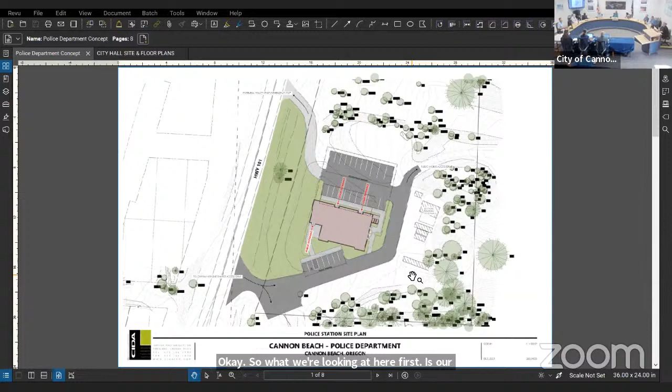So with that, I will share and we'll look at some images. Okay, so what we're looking at here first is our conceptual proposed site plan for the police station. I'll start with a rough overview.

So the highway, the southern access here is the shared access with Public Works. Our proposed site circulation is that being the primary access, coming up to an area of public parking. The building is located on the flat portion up on the hill of that site. We've been working with the police department and with emergency management in terms of maintaining its function as the cache site. So one thing you'll see on here are the existing cache shed and the containers there as part of the plan. At the north side of the building, we have secured parking for officers.

I'll zoom in and talk a little bit about that more in a moment. The northern access here in lighter gray, this is something that we've been working with ODOT on both of these access points. We've gotten pretty clear confirmation that the southern access will be allowable without triggering highway improvements, which was great news that we got from them.

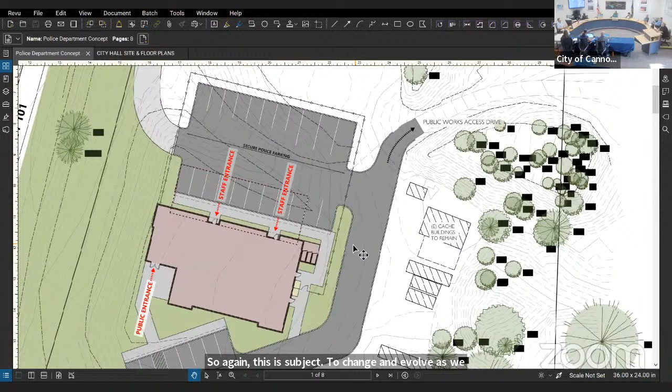The staff entries are from the secure parking area. The idea is that police vehicles would come up here, enter the secure parking area, and then have dedicated entries on the north side of the building, separate from that primary public entry.

Are there any questions on the site plan for this before I move on?

Thank you, Leslie. So when you said that it's probable that the north entrance exit may not be allowed, did I hear you correctly? You did. So if it is allowed, you're saying you want the police vehicles to only be able to use it? That was our original concept.

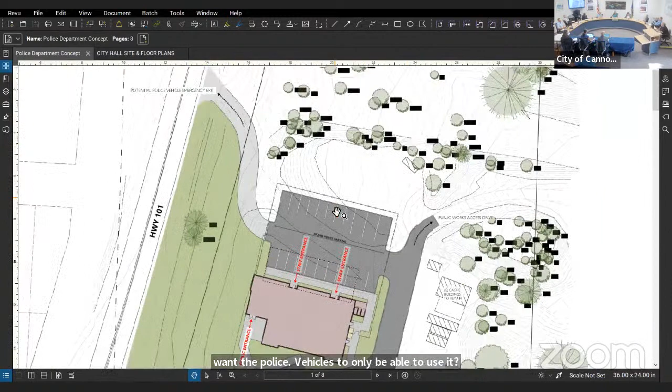Yes, it's shown as a narrower road than the primary entry and exit. The concept is that this would be a fast, efficient way for police vehicles to leave the site without crossing other traffic, so it would be an exit-only path from the secure parking. So if anybody parked in the public area would just need to turn around and go back out the way they came. Correct.

What we learned from ODOT is that they don't have a record of this being a permitted access point, so to keep it, we will need to apply to have it granted as an access point. Thank you.

Leslie, there's an area in there that's been used as a helipad. Is that still part of the plan or is there an alternative plan? So the plan right now is to size that secure parking area sufficiently so that it may be used for helicopters. I'll say this plan is being reviewed currently because we received the survey work to understand the topography a little bit better.

So we're currently looking at ways to lessen the impact on grading. My guess is that will impact that secure parking area the most, because that's where we have the most change in topography.

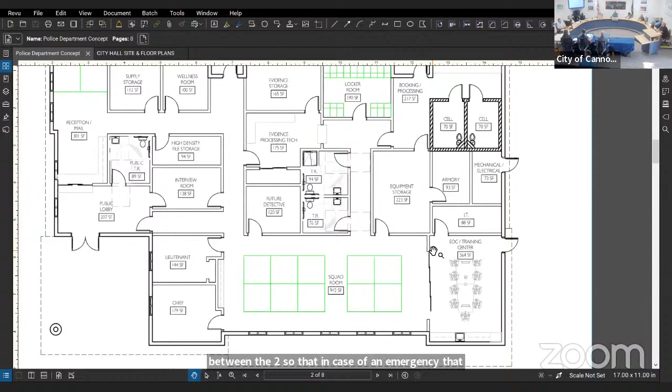This is a sliding wall between the two, so that in case of an emergency it opens all the way up. You can also repurpose that squad room for a large area out of which to operate the EOC.

From this second entry, just moving to the back, is another secured area of the building. This is the processing, booking, and the couple of holding cells we have. So if someone is in custody entering the building, they would be limited to this corner for booking and the holding cells only.

Beyond that, a few other areas we have storage for equipment, storage for evidence, and evidence processing. Those are the primary functions we're looking at. Any questions or comments on that?

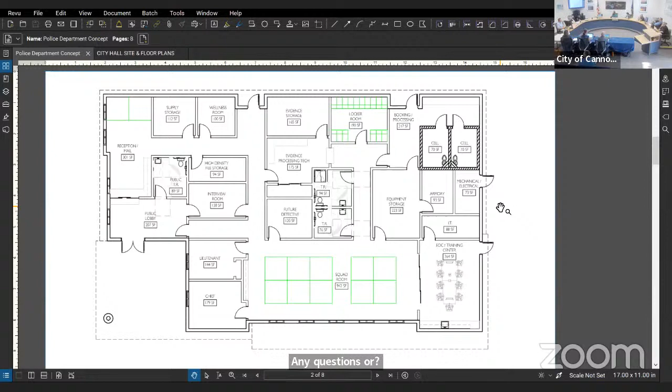Where are the showers? There is one shower; the toilet rooms are placed centrally. One of the toilet rooms includes a shower, the other one does not, placed in proximity to the locker rooms. That's one of the comments we may review, for reorganizing to get that even closer to the locker room.

Did you mention the evidence processing and evidence room? Only very briefly. So evidence processing is here. It is located here because it is admin staff who has primary access as the evidence processing technician, and this is another very secure area with exclusive access to evidence storage.

This rectangle you see here in the wall would be an evidence pass-through, kind of like mailboxes, so that officers coming in from this back entrance can drop off evidence and work with evidence before it goes to the evidence tech.

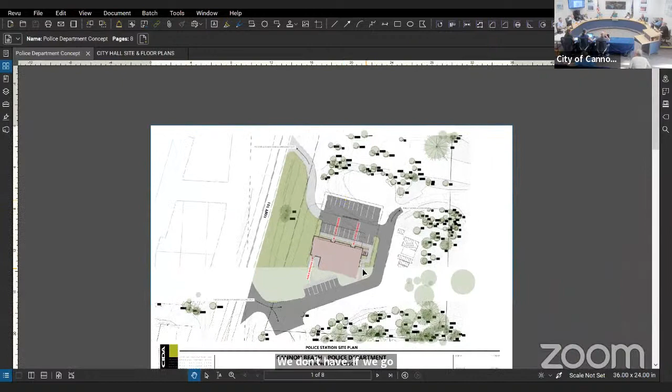The site for that is fairly constrained. We don't have a lot of area to grow. Depending on how this secure parking area evolves, there may be some additional area on the north side of the building that we could push that way. We are proposing covered parking back there, but there may be some additional flat ground.

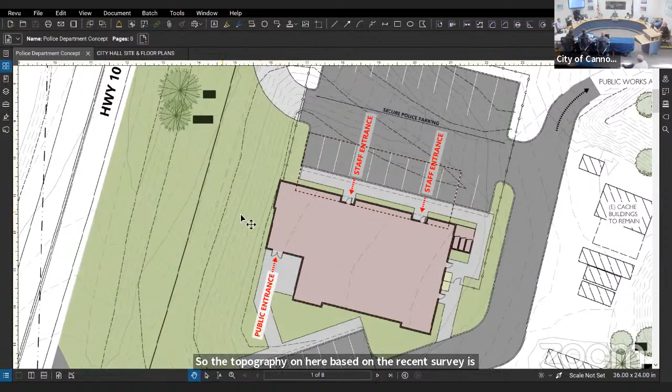Towards the highway, it would be a challenge to grow on that slope. The site plan shows what appears to be quite a bit of room, but in reality that's not the case. The topography here, based on the recent survey, is included - all of these dashed lines represent a foot drop. So in the future, if that were to be an addition, it would require additional site fill to build that up to have level ground.

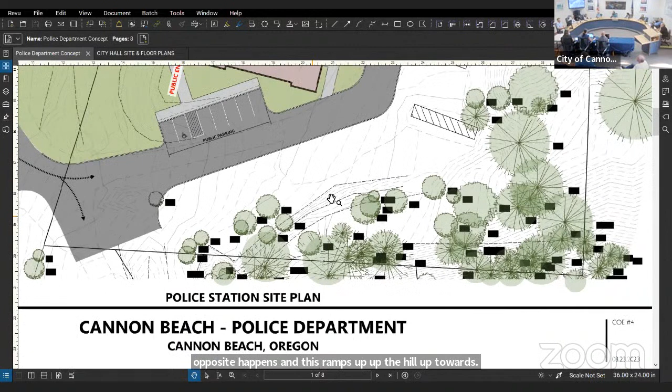Can you talk about to the north, what happens with the grades too? So to the north, we do have another area that is relatively flat - this is where I think some of that secure parking may shift. But around the site it gets very steep very fast. There's a creek or waterway that runs down north of the site, so it drops off pretty significantly. On the south side of the site the opposite happens, and it ramps up the hill toward the water tower. So the slopes would require substantial consideration.

In addition, if securing that availability of space immediately adjacent is something we wanted, then we would want to discuss that now. Because then we would relook at the parking - now that we have the survey, we can say okay, we want to preserve another 1,500 square feet or whatever the number is for an addition. If we want to do that, we should plan that now. And it's a great question.

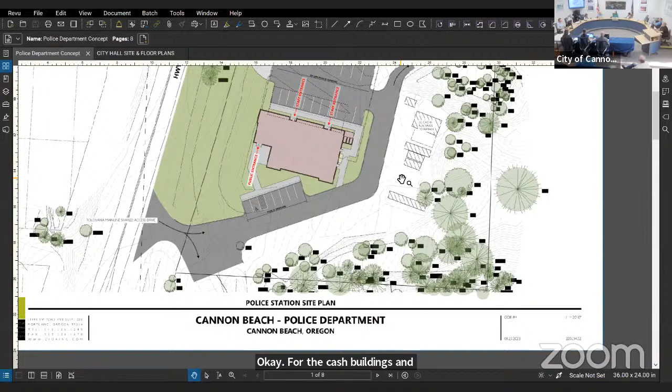So the cache buildings and containers shown are there and they're going to stay there. Yes, they're shown according to the survey work. Just to clarify, the building could go that way and the driveway could move further out, and the cache buildings could be found an alternate location if needed. So that's another kind of exit strategy to add more square footage down the road.

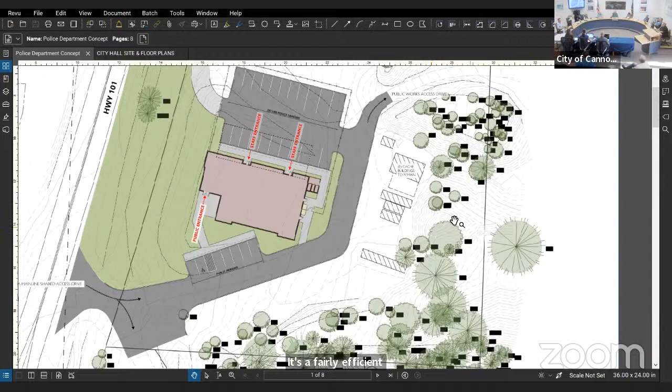It's a fairly efficient plan. What you're seeing is meeting the needs, meeting the projected growth, but there's not a lot of extra space—not a dance floor in there.

Did you want to say something? Yes, in the past we've offered tours of the police station and City Hall. Just check with Jason and we can offer tours of City Hall and the police station tonight after the meeting, if anybody is interested. If you haven't, you should. Yes.

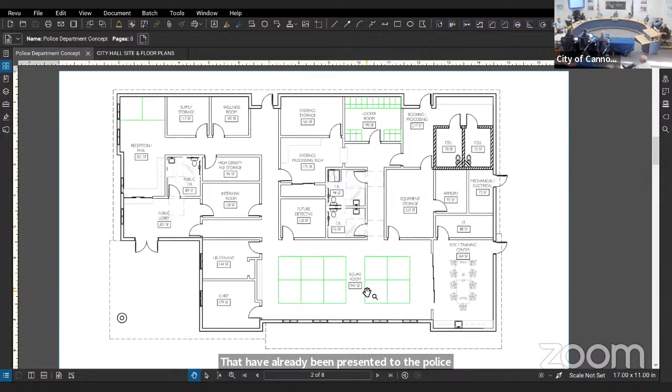Okay, so we're ready to see what it might look like. Again, these are conceptual plans, but we put together a couple of options that have already been presented to the police department. We have a preferred option here to present. This is option one.

Again, this is the entry point for the public with a covered area. The raised portion of roof here is the squad room. Up here we had the chief's office and lieutenant's office.

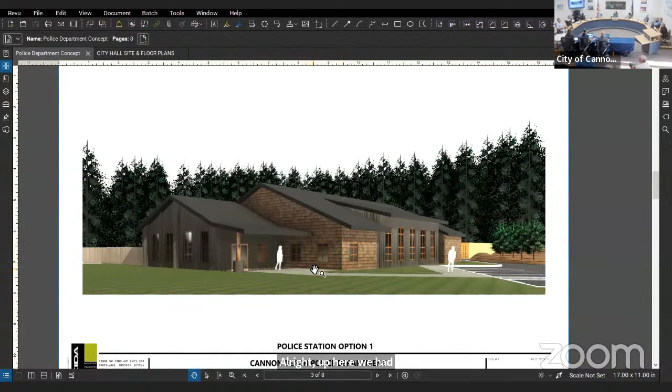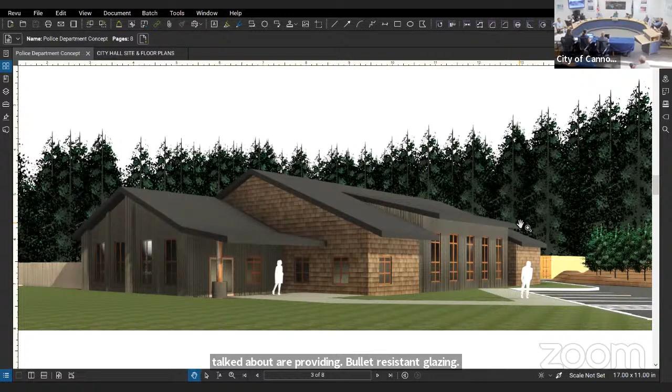One of the things we're working through is glazing and security, so there are many options here. We've started having these conversations and they continue about balancing security concerns, privacy concerns, and natural lighting, and which areas those make sense for, and how we can mitigate some of the security concerns through various options. Some things we've talked about are providing bullet-resistant glazing of certain levels in certain areas. Also, we've talked about modifying the size of some of these windows or changing the type of glass for more privacy, potentially raising the windows up so they can allow natural light, but also privacy and security. So that's something we're talking about and will likely evolve as we move forward.

So the site is out of the tsunami inundation zone. Yes.

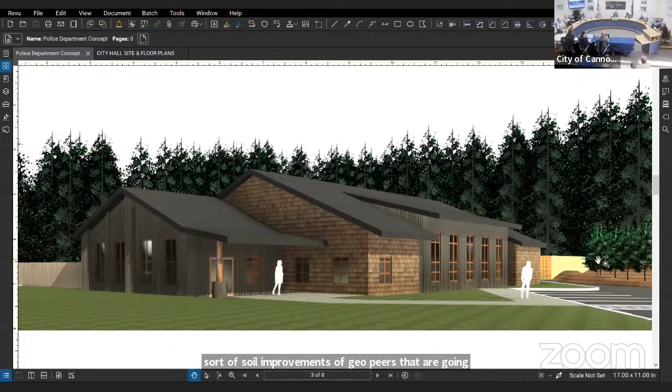Maybe Jordan, can you describe what's involved in the category 4 seismic construction that we don't really see here? It's really attachments of walls to foundation and then roof to walls—that's the biggest piece, making it resilient. Then there'll be a shear wall component that keeps the main structure together. You don't really see a lot of it; it's really a lot of hold-downs holding the walls down to the foundation. In this case, we're going to have some soil improvements and geopiers that will tie the foundation to the soil in case of liquefaction, along with a lot of strapping on the roof to the walls, so really making it one main diaphragm. The category 4 seismic is required by law in order to be an essential facility—it's required. Yes, Emergency Operations Center. Yes.

And that means that it will remain operational during an event. What does this building require in terms of withstanding a landslide? Because this has been deemed a landslide area.

We will know more about that when we get the geotech report. The drilling is scheduled 2 weeks from today, and we expect that report at the end of September. I'm hopeful, because the equipment that was set up for the Southwind site for the landslide, we had someone go back and read what had happened over these last several years, and there had been no discernible movement.

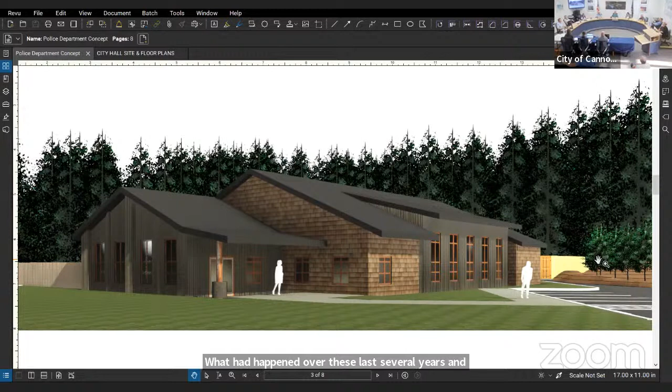If there was an earthquake, how would that landslide? I mean, that's when your landslide is going to occur, is when there's an earthquake, I would imagine. So the geotechnical engineer is going to advise us as to what areas need to be stabilized for this building.

So they understand where the building is, where the slopes are, and they'll advise for under the building and for the site. So you don't really know yet how that's going to go. The city has retained a very good geotechnical engineer, which CETA has actually worked with several times on difficult sites. So we're looking forward to seeing what the results are.

And they're going as fast as they can. The drill rigs are just out. And the cost estimate, have you taken that into consideration for the cost? We 100% have the cost for the soil stabilization underneath the building included, and soil stabilization outside of the building for landslides. Again, we have a healthy contingency to deal with those types of things.

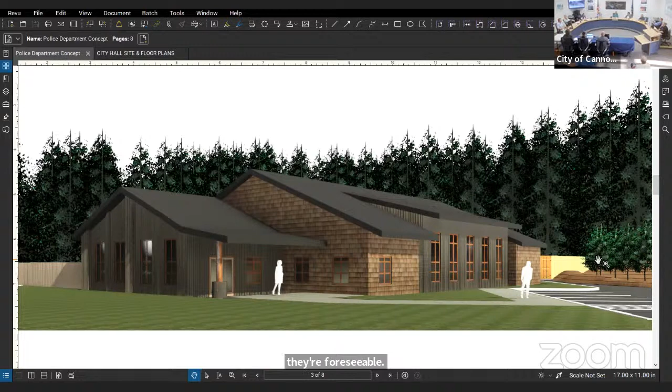We just can't have too many of them, I guess is what I'm trying to say. Yeah, but we have dollars to cover these things. They're foreseeable, just not quantified. Will you be giving us a report on the landslide study?

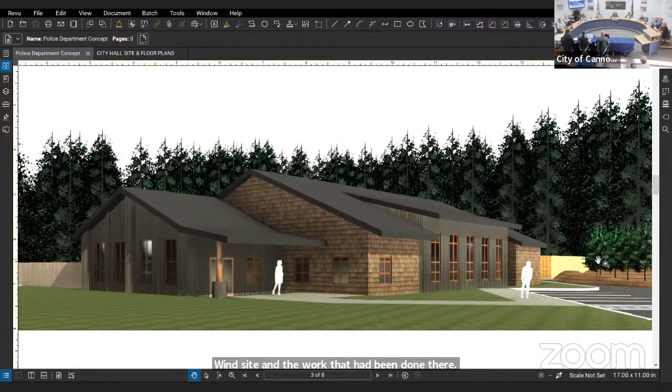Yes. I'd really like to see that. I will say, when we were initially talking about putting together the budget, the best information we had at that time was the Southwind site and the work that had been done there. So that's what we were looking at, and worst case scenario assumed that would be applicable here as well.

So the same concept here, just a slightly different angle. Again, the large area in the middle is the squad room, the EOC on the right, and a front view of this initial option.

The second option, this one, the roof line is a little bit different. It's based on the same floor plan, so you'll see the same volume that is the squad room. This one, because of the offsets in the roof, has some additional opportunity for some high windows into that squad room that would provide natural light but not be a security concern.

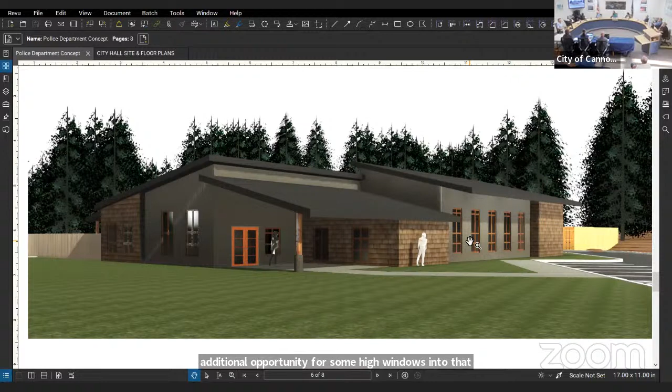A different view as you come up the access drive. And a view of the front from the highway.

Can you mention which one's preferred? So the second option here that we're looking at now, this initial option we were told was preferred by the department. Overwhelmingly approved? No, I think that was what they had decided once we had them. That's what they agreed on.

We made this presentation to the officers. And was one of the factors the fact that you could put those windows up higher? Yeah.

Any more questions about the police department?

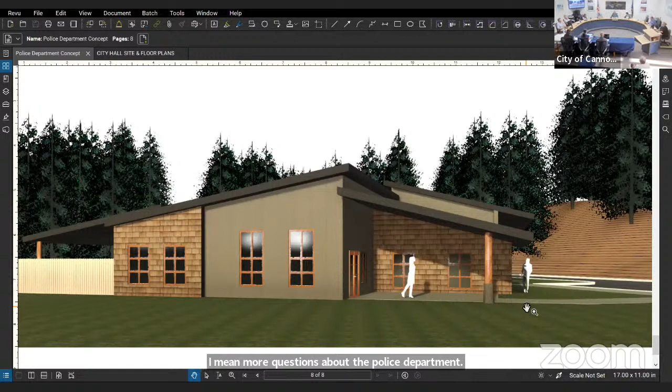Jan? Jan Siebert Warman, P.O. Box 778, Cannon Beach. Well, thank you so much. I think I love the first building, especially, but I want the people that work there to be really happy.

I just wanted to ask Jason something, and I wasn't sure if this was appropriate timing, but I had read somewhere that, well, I was getting confused because one place I read there was going to be a 6,000 square foot police station building. And then tonight, I think Jordan mentioned 5,000 square feet.

And I read somewhere or heard somewhere that Jason, you were comfortable with a 5,000 square foot building. I would much rather have a 5,000 square foot building than a 6,000 square foot building. We're not a big town, and I just would like to have some sort of tweaking it a little bit smaller from the 6,000, but if we go to 5,000, I think that would be okay.

So I'm just bringing that up because I think a lot of people are very concerned, and maybe we could save a few pennies tweaking it back.

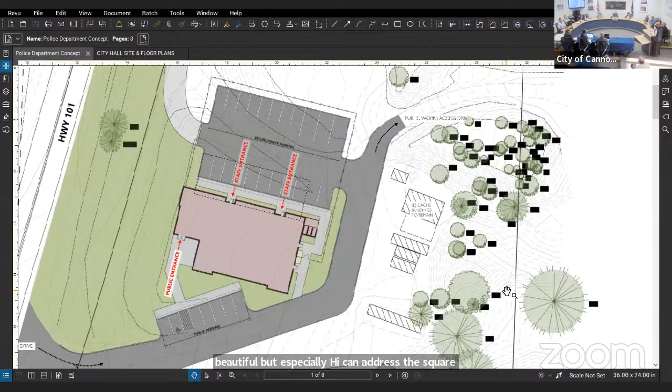I can address the square footage if it's appropriate. So what you're looking at right now is actually in between the two. This floor plan is right at about 5,500. As we work through some of these adjacencies and efficiencies, our goal is to incrementally get that back down to about that 5,000 square foot goal.

Okay, Jan, whenever there's an iteration, either in City Hall or the police station, the first information that's reported to us is the new square footage. So we're constantly watching it. Thank you, Jan.

Sam? Hello. Steve DiPaolo. Knowing that this is a concept, I will reserve a lot of my nitpicky stuff for later.

I wanted to address a little bit of the question that Nancy had about the landslide. Just historically, geographically, I've talked to Tom. This is not a landslide area in itself. The hillside just to the southeast could be. So more than likely that would fall down on top of it rather than it going anywhere.

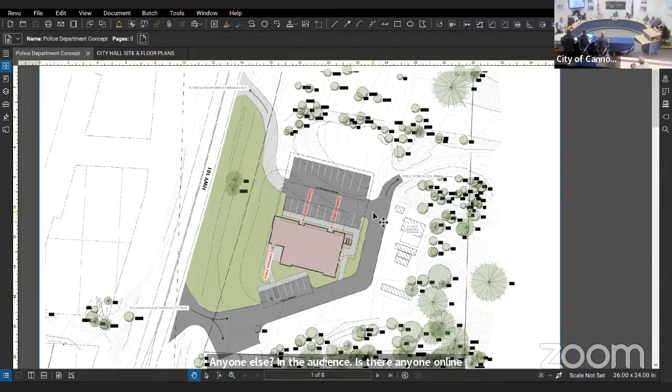Anyone else in the audience? Is there anyone online that would like to make public comment? Please raise your hand. Okay, not seeing anybody. Okay, thank you. Anyone have any thoughts from the council?

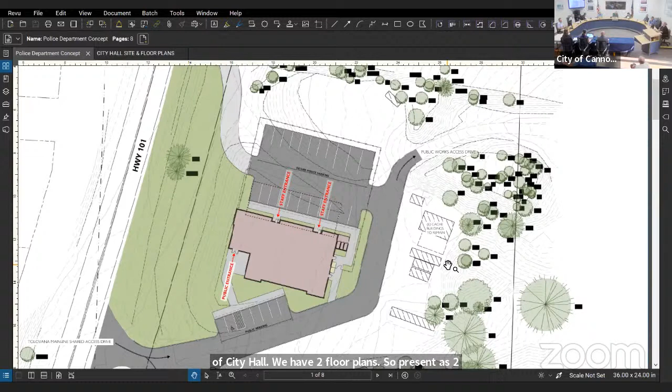Okay, thank you. On to City Hall. So the presentation for City Hall is similar. In the case of City Hall, we have two floor plans to present as two options and a few more concepts of what the building might look like. But I'm going to start with the first option and its site plan.

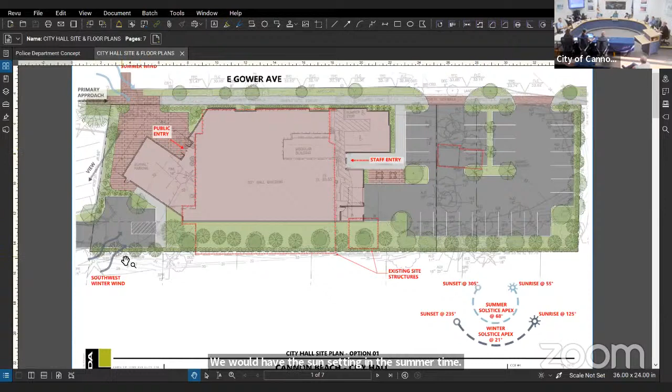One thing we were looking at was the weather patterns, both wind and sun. In the winter, wind comes primarily from the southwest, so we would have an opportunity here to create an entry that is buffered and sheltered from that cold winter wind. The summer wind comes from the northwest. The sun also - down here in the corner we show where it is rising and setting at both the summer and winter solstice. We would have the sun setting in the summertime at that west facade. In the wintertime, it sets similar to where the wind is coming from.

Another thing that's important here, and this will be on both options, currently the building sits over the property line on the south side of the property by about a foot or a foot and a half. Both of these options include a 20-foot setback along that south side, so the building will be buffered from the residents south of here.

We're proposing a main entry courtyard, and by doing that we are losing a few of the parking spaces that are currently out front. We are able to find efficiencies at the back of the building, so right now the plan has 30 parking spaces in the back, which should be sufficient for staff parking. That way, staff parking wouldn't burden the lower parking or the street parking.

We have also incorporated into the building footprint the function of the garage. Right now there's an exterior garage and a couple sheds. We have a loading area with an overhead door that would lead into an unconditioned garage space in the same building envelope.

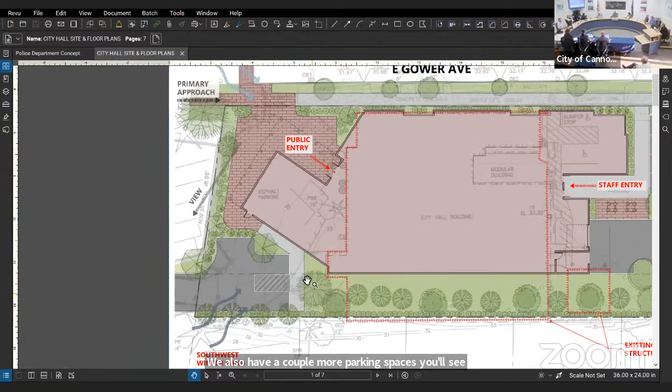We also have a couple more parking spaces adjacent to that area. Because much of the parking is in back and the parking out front is lower, we've incorporated a couple of spaces for accessible parking near the primary public entry. These spaces would be accessed from the lower parking through that current drive aisle and be dedicated to accessible parking.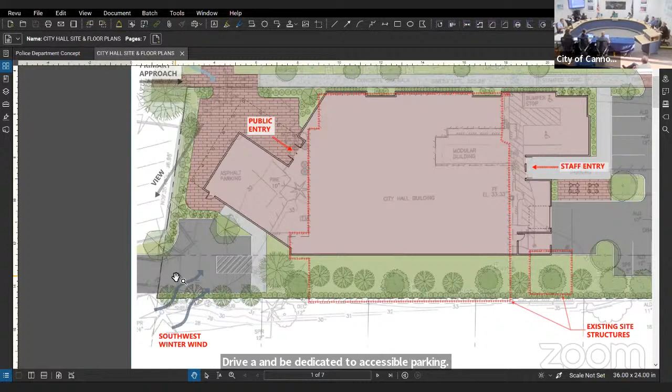One of the things that wasn't mentioned is that part of the angling of the council chambers is also to acknowledge the view to the rock. So that plaza will have a line of sight to the rock. This is an approximate angle of where that visibility is from.

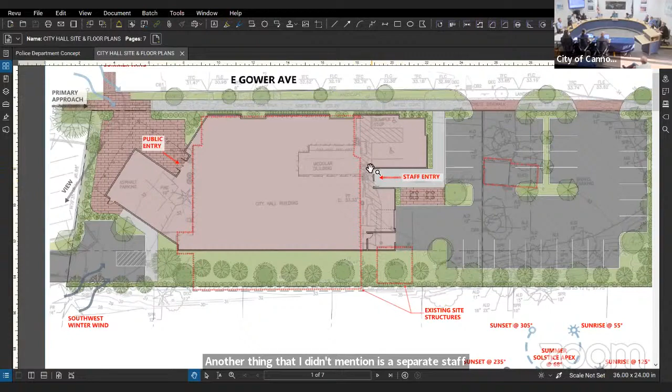Another thing I didn't mention is a separate staff entry. In the back of the building there's a couple doors - one would be a primary staff entry for all departments. The second door, as you'll see on the floor plan, leads directly to a mudroom, which would be shared by Public Works and HRAP, a place to take off dirty equipment and boots and get them dried, then go from there directly to their departments. Adjacent to that staff entry plaza, we have a space for staff with a couple tables shown to be outside, say during a lunch break.

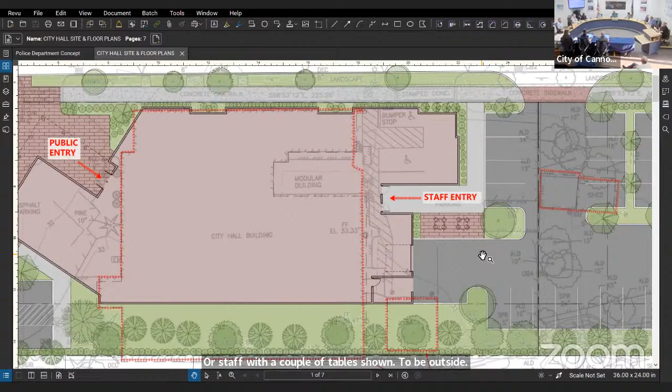This plan does include redoing the curb cuts and drive aisles. The front one we are showing eliminated - this would be pedestrian access only into this entry plaza. In order to be more efficient with our parking at the back of the building, we would be proposing relocating where the current driveways are.

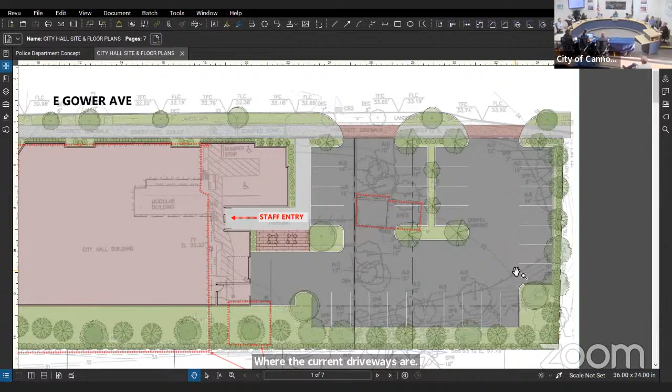On this site, I will also mention we do have the geotech report back. It was encouraging in terms of what will be required for the foundations and piles. We've had our structural engineer look at it and make some revised recommendations, and we're currently working through that. The survey for this site, though, has not been recently updated - that's something that is pending.

How exactly this parking in the back lays out will need to be confirmed once we have an updated survey. But a quick key on the geotech: the old piles were requiring around 100 feet, and the new piles are about 35 - a significantly better pile situation, significantly shorter and smaller in diameter. The diameter originally was assumed at 18 inches and went down to about 6. They were smaller, and they also battered some of them, angling them into the earth versus straight down.

How high would the building be? It's a single story wood frame building. We kept the eaves from the ground up. Is it going to be a ground level or raised? It's a ground level, single story at ground level. You'd be at approximately the same elevation as you are here. It'll be just wiped out completely when the tsunami hits, right? Of sufficient size.

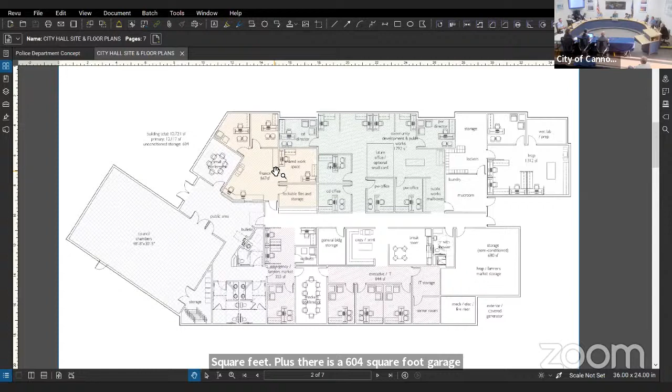I'll go to this floor plan. So the building total here, all the departments are 10,117 square feet, plus there's a 604 square foot garage attached. So the total building is just over 10,700 square feet.

And what is this building now? Of course, it houses not just City Hall but the police station, but I'm curious so I can get a relative sense of size. My best information is that this building is about 10,300 square feet, but then you have a few outbuildings as well.

Does that include the modular? It's a little hard to tell because we didn't do the existing building survey. My understanding is yes, it likely includes the modular, because it's inside the building, it does count. The existing building also encompasses more land than it should.

So I just wanted to make sure I understand, and I think I do, but the current public parking is unchanged in this. The public entry that you show does not take away any public parking, it just takes away what parking is right out here.

And the parking behind the building, is that strictly staff or is it staff and customer or public parking? I wanted to be sure in laying this out that it was sufficient for staff parking. I think how that is enforced is not clear to me. I would imagine it would be open parking and other people would be able to park there, unless that's not how the city chooses to function.

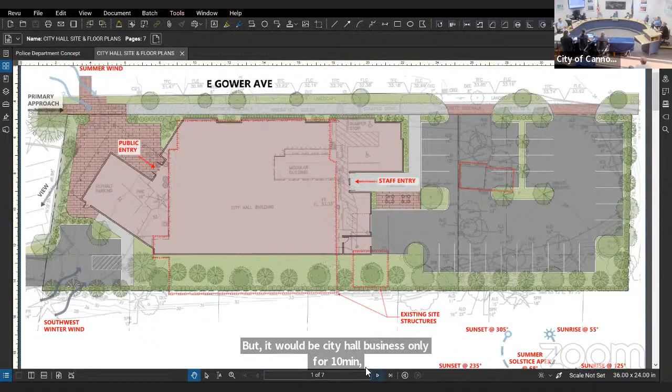So I can zoom in here for better viewing, but this front part of the building is the area that would be open to the public. So a primary public entry into a public lobby with direct access to finance, reception, direct access to the council chambers, and a small conference room.

The small conference room here would be for general building use, for conversations that happen outside of council chambers, for quick meetings between public works or community development and the public that comes in to review plans, or any other departments in the building who need to meet with the public in a better location than the public lobby.

Right, so to have a table and share drawings. That function occurs on the counter in finance, and the idea is to get that out of there and have a small conference room that people can use for those kinds of discussions separately.

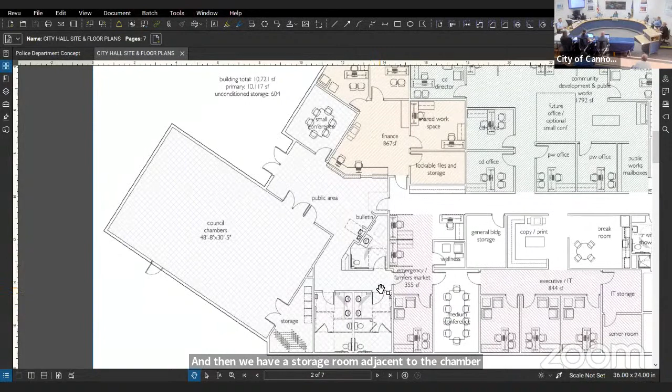The other portion here open to the public are the public restrooms, and then we have a storage room adjacent to the chamber for tables and chairs. The other thing you'll see here is a small countertop open to the public area, because the break room is quite further into the interior of the building, so this gives a place for beverages during evening meetings, or for some public concessions.

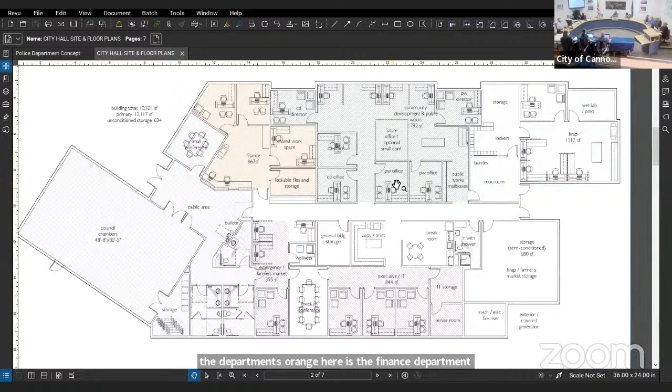Zooming back out and going through the departments: orange is the finance department, green is the shared community development and public works department. The executive and IT department is on the south side of the building. Central in the building are common core elements for shared use—general building storage, a centralized copy and print work area, and a staff break room.

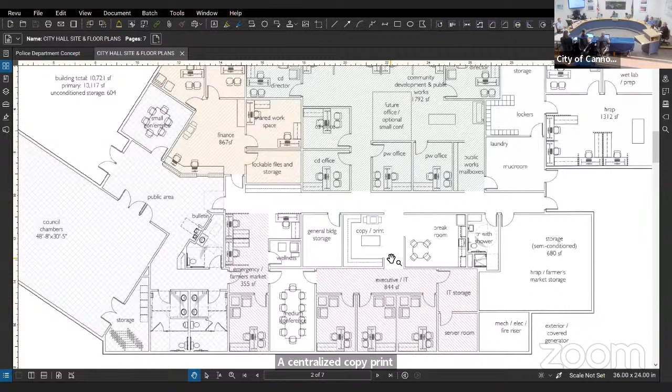One thing I mentioned previously is the two doors for the staff entries—one going directly into a central corridor, the second going into a mudroom that then has access to the Haystack Rock Appreciation Program department and into public works, including the public works mailboxes and general work area.

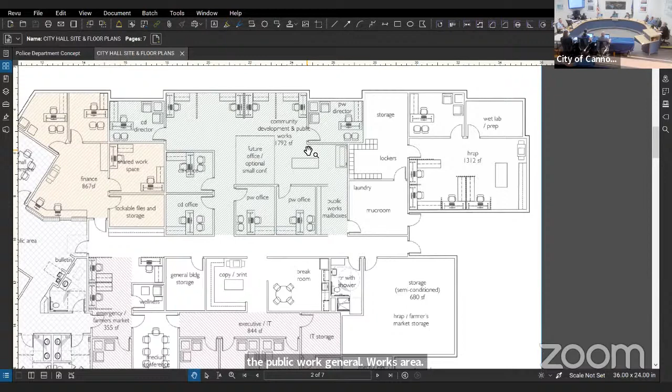This layout has been presented to the department heads for initial feedback. We've been working with them to make sure it functions the way each department needs it to function.

In terms of what this will look like, we have a couple of pictures to show you, just to show you where we are trending. Again, these are concepts. This is one concept we're working with.

We are still continuing to review the council chamber. It will require further design exercise to get the size exactly right. We have flexibility for its size and shape to evolve, and its lighting, to make sure the audio visual systems work optimally—balancing natural light with the technology that will be in there.

Along Gower Avenue, we were attracted to the idea of a streetscape, so there are variations in the facade so it's not a long, solid facade. This option has a protective canopy over the entry nook and alcove, and also over the west face of the council chamber.

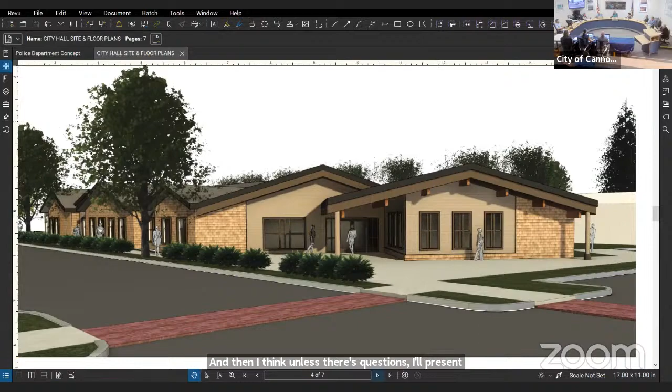This takes us back to the site plan. The building is located similarly to the current city hall, and the parking in back remains largely similar. One thing different on this one is that we pulled the generator away from the building—this enclosure on the right is for the generator—so we did lose one parking space back there if that's the preferred option.

This takes away that angle, so it squares everything up and simplifies things. It also makes the entry courtyard a little bit bigger. It has similar accessible parking on the southwest corner with access to that public courtyard.

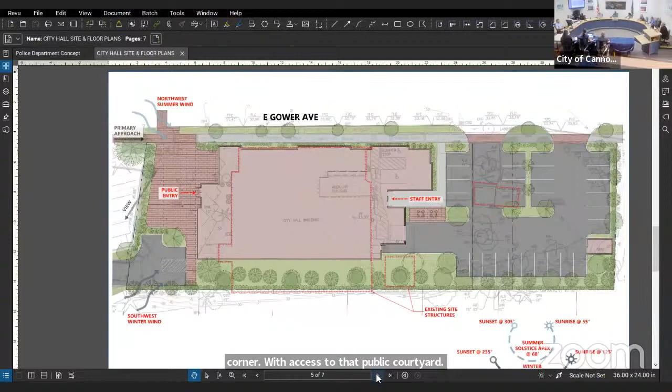Looking at the floor plan here, this building is within 50 square feet of the other option—both are very comparable in overall square footage. Whichever is selected to move forward with, we would continue to push, pull, and optimize things, but both are in the target range of our initial projections.

This one has the council chamber a little more integrated into the overall building. Again, the primary entry has a small lobby and access to finance as a reception, plus access from the public area to a small conference room and public restrooms. This option shares the mudroom entry in back and a shared amenity between HRAP in the northeast corner and the Public Works and Community Development departments.

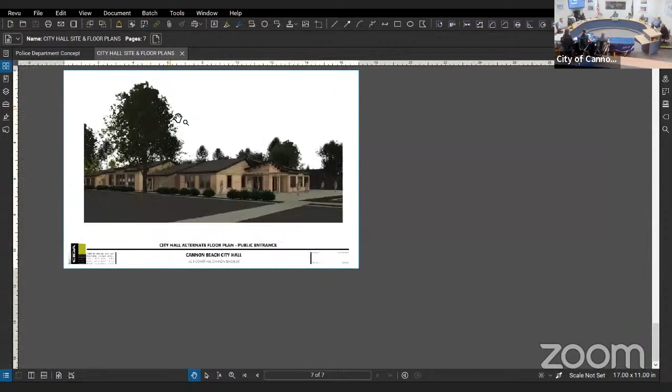In this one, the front of the building is shaped a little bit differently—we were looking at different ways to articulate it.

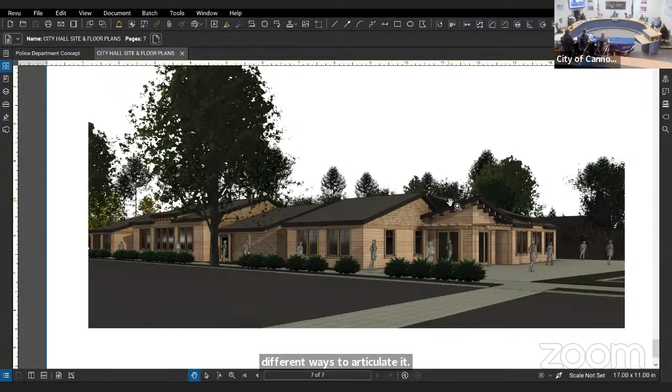What's the cost difference between the two, roughly? Right now we're very similar in square footage. Option one may have a little more of a cost premium just because changes in direction and angles cost dollars—so as far as construction goes, square is better.

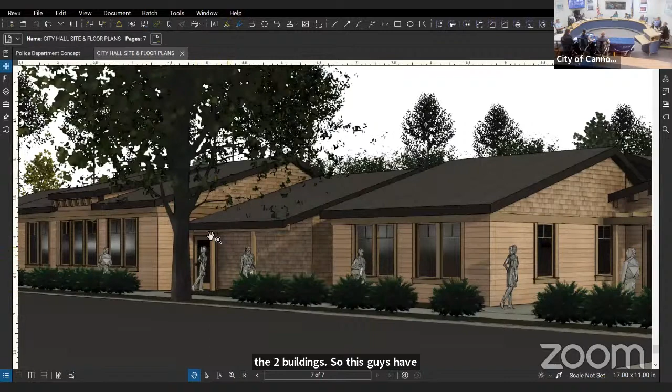What is between the two buildings? Is that a door between the two buildings? So this does have a door shown in the rendering here. This is based on an iteration we were looking at that had the council chamber deeper into the interior of the building. So what you're seeing is a second exterior entry, or an exit, from the council chamber. Would the public be able to get into that door?

That would be an operational question. It could be exit only and could feature hardware as exit only. The council chamber will require more than one exit. Alternatively, it could be used as an evening entry. In conversations, it sounds like the preference would be to have an entry through the primary lobby. Yeah, because I'm a little concerned about security nowadays, especially. But all of them need to access the toilet rooms, so you're going to be coming into that lobby space to do that. So if it can easily be just an emergency exit only.

Do you have one more view?

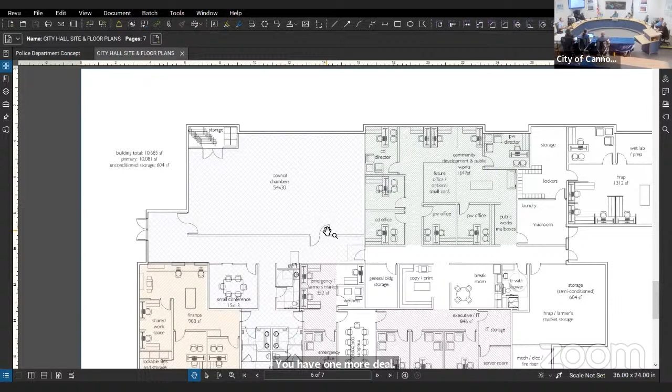And both options, you don't have that one solid facade. You have offsets, which I really like. I think that makes it almost look like several small buildings, which is nice.

Honestly, I spent a lot of time here with Bruce, walking and looking at buildings and talking about streetscape to make sure that it didn't feel too large. Yeah.

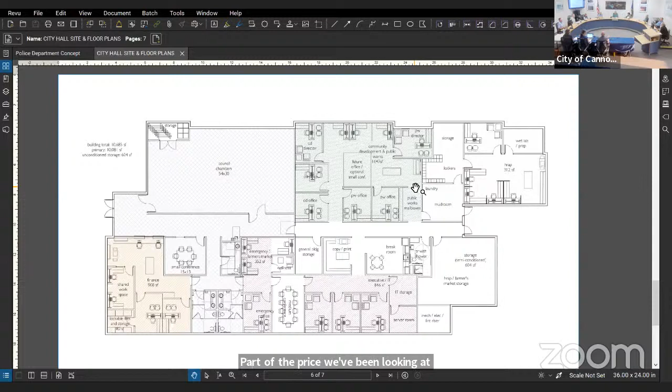I have questions about cost. All the cost contingencies we talked about for a police station are also involved here, the same percentage. And in this case, also temporary office space when workers are displaced, that's all part of the price we've been looking at. Demolition of this building complete and then the temporary quarters. There's $200,000 in there for the temporary quarters. We don't know what that looks like or what those requirements are going to be, so we're going to have to manage within that budget, but yes.

Okay, where would you put those? Still don't know. My initial thought was somewhere out front, but I don't know if there are other spaces available within the city that we can relocate folks to. Don't quite know how many folks we have to relocate, but typically in projects like this, we put them close. And then if those parking lot spaces are available, that's where we'd like to put them. Although I'd like it for construction staging as well, so.

So there's been some public comment regarding the cost of this project and comparable projects. Have you seen any of that? I've heard some of that. I haven't been able to look at the comparable costs in detail. It's really hard to speak apples to apples with different types of construction projects.

What I can say on this project, especially what we've been tasked with as far as putting together this budget, is I've been asked to look at what a gallon of gas is going to cost in 3 years, within 5% of accuracy, for two large construction projects on the coast. I am comfortable with the cost we provided can build these two projects 2 to 3 years from now for what we're providing. Do I think the cost per square foot is a little higher than what you normally see? I do, but I can't go over, right? So I have to be conservative for this project.

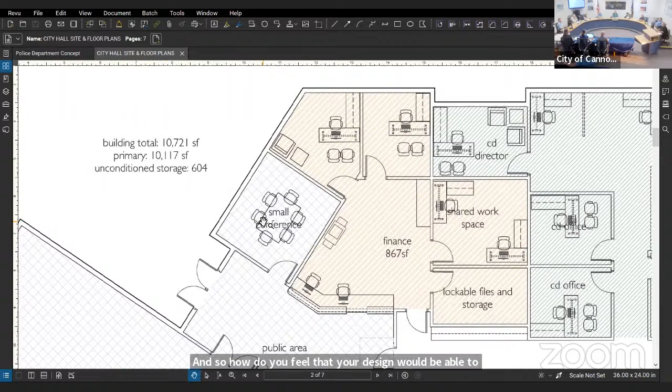And how do you feel that your design would be able to incorporate those to make them work the most efficiently? We would be, because of our attempt on the streetscape here and to fit in with the character of Cannon Beach, we do have a lot of roof slopes.

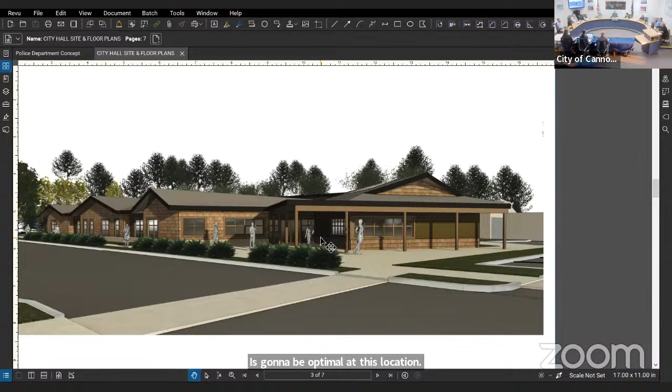We would be looking at the orientation of those roof slopes to make sure that where we put solar panels, should we go that route, is going to be optimal for this location. There's always a study done at the beginning of a project when we start going down this road of renewable energy, looking at whether the project is viable for solar. There are certain sites that just aren't viable for solar, so that checks that off. If this site is viable based on the study, it'll dictate where the solar panels need to go.

What you see in those renderings is primarily what's happening on the roof at council chambers and along Gower. But because this is a fairly large building, we have flexibility at the southern wing to modify the roof to be appropriate for solar panels as one option, but also to act as screening for potential heating and cooling equipment that might be located on the roof — almost a flat roof back there if we need to.

Thank you, I appreciate that. So what are we looking at for timing of these two projects? Are they simultaneous? Are they staggered?

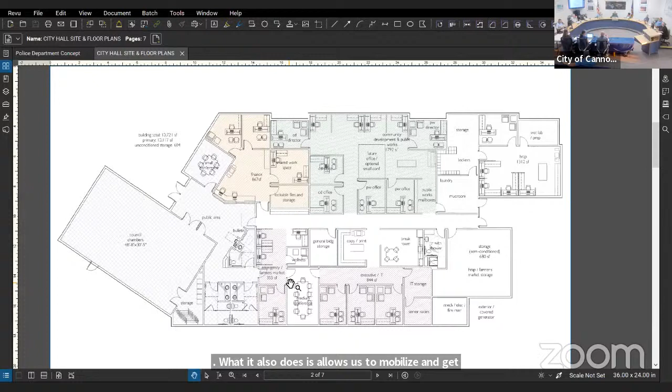Currently at this early stage, we're simultaneous, linear together. Our hope is that we can get PD moving ahead of City Hall. It does a couple things for us: it allows us to get some cost certainty on the PD piece while we're still figuring out the City Hall piece. It also allows us to mobilize and get moving on the PD project early, then stagger our subcontractors through the two projects. For example, once concrete's done up there, we can move them down here and stack the trades that way. So there are some efficiencies, even if we only need a couple months' gain on the PD.

That would be our goal. Our hope is that because the police department is a smaller, simpler building, it will depend some on our approvals to move forward through the phases. But if we can expedite the schematic design period on just the police department, decouple the two projects, and keep that one moving faster, that would be our ideal.

I haven't really heard it, but it seems like maybe there's an ask on your part about staging City Hall somewhere — it seems like you might need some more. It is going to be a problem or an issue that we need to address during design. Yes.

To reiterate, one of the comments you made was that if there's a location in town that makes sense to relocate them, there could be cost savings and also avoid having them in the public parking area. That's where you currently have them assumed to be, but there might be a more cost-effective or better solution elsewhere in the community — and other possibilities of using the parking you've got in the rear, which is the last thing you'd finish.

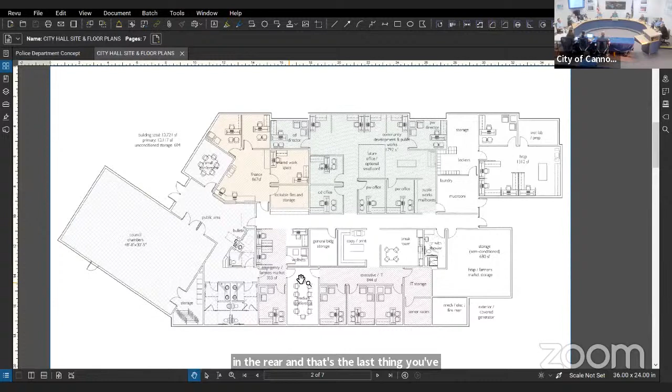For you folks, or for temporary? For us — oh, for temporary? Yeah, no, I'd like that too. I would rather have construction allocated to that back parking lot and give you guys the front than the other way around. But it really depends on how much space you guys need, how many people we need to house back there.

That was what I typically envisioned as our staging and lay-down area, and then we do the parking last. Yes, okay. That keeps us off the street side, tucked back behind the construction.

Any other questions or comments? Okay, then we'll go ahead and open it up to public comment. Anybody like to make any comment or have any questions?

Sam? Sounds like Jan. Yeah.

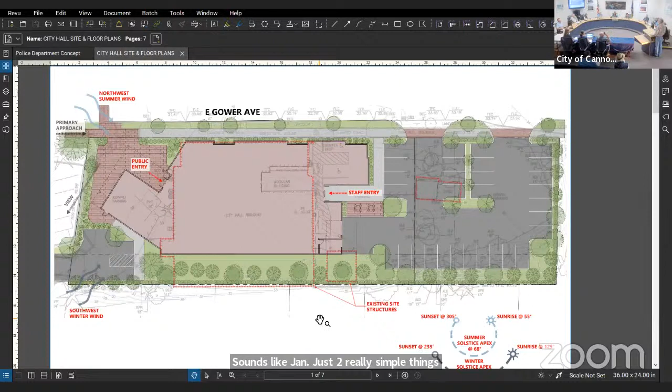Just two really simple things. Rusty, we are going to have this on the web soon — yes, I will post the presentation probably tomorrow. Again, I just want to reinforce the fact that this is conceptual. One of the big dangers for presenting conceptual plans is that people latch onto them immediately and say, 'this is it.' It's not — they've mentioned that, things will change. Saying that, I'm going to offer a bunch of ideas and concepts after I can look at them with a little more detail, and I'll offer them to Jennifer and Leslie. It's better suited for myself because it's really hard to just immediately see it in the last half hour and be able to make the critique.

So other than that, thank you. Thank you. Thank you. Thanks, Sam.

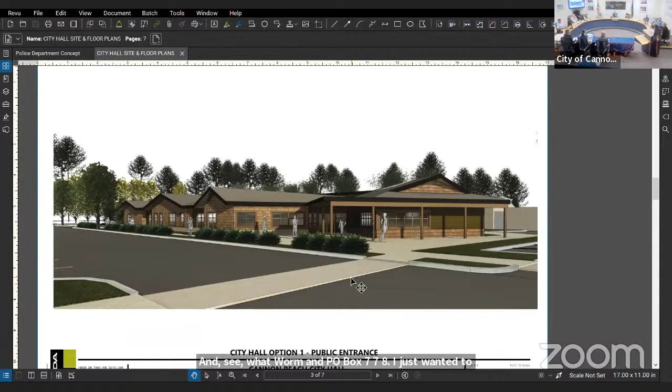I just wanted to make sure I'm understanding correctly. So with the back parking lot, you won't be doing anything to harm any of those trees back there? Because we've worked really hard in past years to keep those trees, and the neighbors also have really wanted that protection.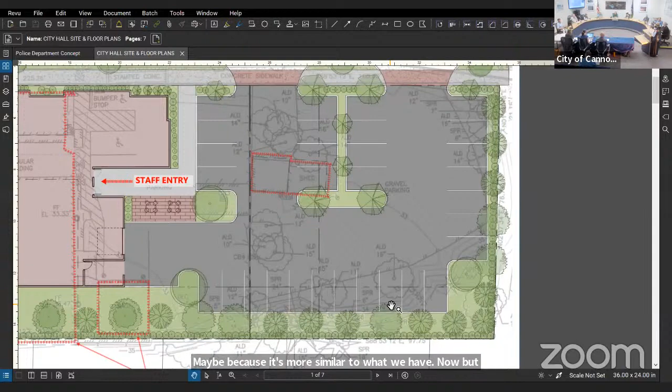So I would just ask that if you can possibly respect those trees as much as possible. And also, just a personal thing, design wise, aesthetically, I really prefer the second building. Maybe because it's more similar to what we have now, but also because maybe you had some trees on the Gower Avenue area there. You showed some when you had the actual picture of the building. Anyway, I would love to have as many trees as possible with this building. It's what makes our town so beautiful, I think, and we're losing a lot of them every day.

At least some every day, it seems like. Let me think of anything else. Again, if you could tweak it back at all, but I'm really grateful. It's not much bigger than what we have now. I think that second one is especially lovely. Can you clarify if it was the site plan you like on the second one, or the elevation? It's the elevation, I guess, when you show the actual 3D.

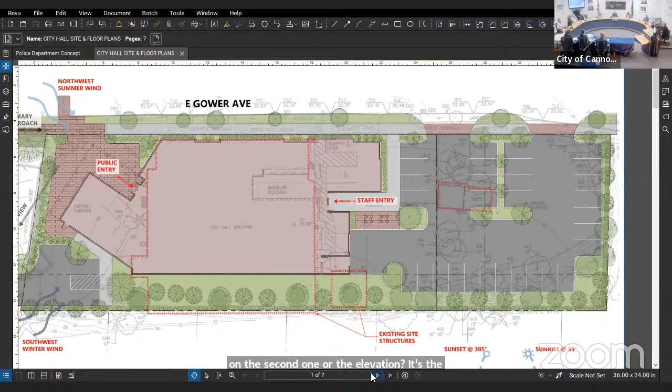The other thing I wondered was with the plaza area in the front, with both of them, are you envisioning like a brick plaza? It looks kind of like that in one of the drawings, but I personally would go with less of a plaza and more landscaping, but that's just me. We have engaged Joyce Jackson as our landscape architect on this project, and she has started to look at this and explore ideas for what that plaza could become.

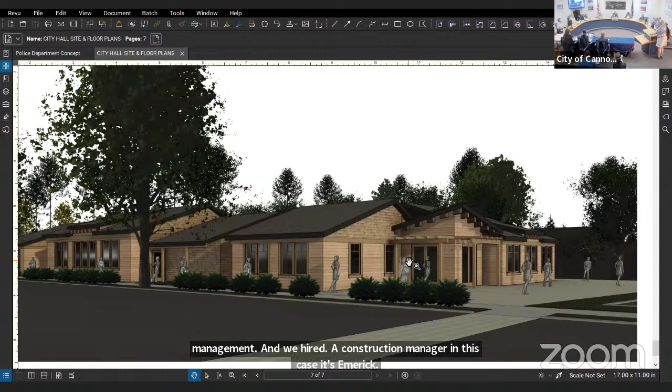Yes. Because I would think, I like these architectural plans, but it seems to me you take those plans and put that open for bid to various contractors. The way that we're doing this is called construction management, and we hired a construction manager. In this case, it's Emerick. What they will do is they will bid out all the subcontractor plans, so they will be responsible for building the structure. They're also involved with planning the structure, so there are some efficiencies there. But all of the mechanical, civil, all those kinds will all be bid out, and it's a public bidding process.

Because it sounds like you've got some contingencies for price increases. I'd rather see a base price and then come back and ask for more money as needed. It sounds like you have some contingency built in. Correct. I'd rather go with a flat price and then come back with a logical request for more money.

Okay, thank you. I do want to point out that when we selected the architect and the engineer or the construction person, they all did their own bid. We bid it out, it was a competition, and these are the people we selected. So all of that has been done. It's not been 'you're going to do it' - it's all been a bidding process, like I mentioned.

Thank you. Anyone else? Is there anyone online that would like to make a comment? Nobody? Okay, thank you. Any last questions council has, or comments?

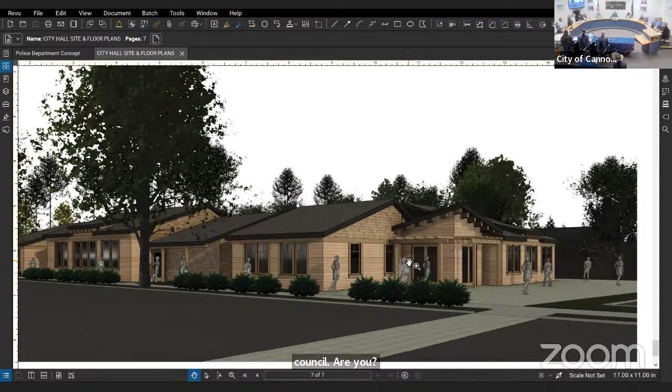Are you ready to select one of the floor plans, which in turn drives the elevations? Or do you want further development and to come back to you? Because we can continue to do this on a two-tier track, but if we have a single floor plan that we're working from, everything becomes more efficient, and we don't have to come back to you so many times asking, well, do you like A or do you like B?

So that's something you need to decide. You don't have to decide it tonight, but we'll have to decide it soon.

Okay, yeah, it's kind of hard to do it just with seeing it. I'd like to think about it at least for a few days.

As we mentioned, things will change. We're still having discussions, we're still evolving. Our consultants are all adding input which may adjust things. So ultimately what we're asking for is direction on which ones you prefer, and then we can march them down that way. Not that the exact wall will be here and the exact wall will be there, that will be dictated as we move forward.

As far as the two city hall buildings tonight, I love that weird offset council chambers, but if it's more expensive, I'd rather that money be put into more green building techniques, because as long as you have those offsets, it looks great. So I'd rather not spend the money on the cool angle, but spend it more on making the building really efficient and environmentally friendly.

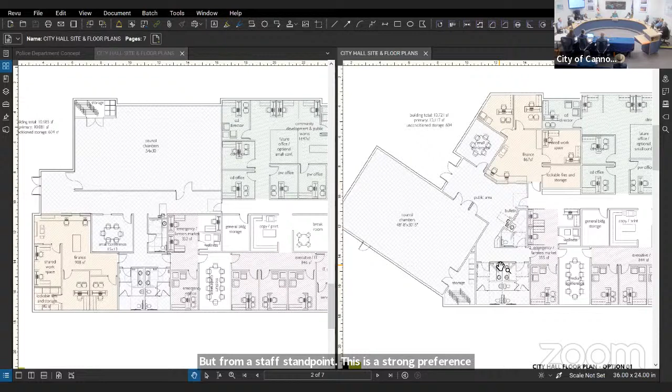Well, the floor plan drives the elevation, and whether that is tilted some or not, I don't know how much of a difference it makes. But from a staff standpoint, there's a strong preference for floor plan A, the first one, the square one. No, she has them reversed.

Oh, I do have them, this one here. It separates the public and staff areas better, it provides more security. And one of the things, Nancy, when you said that, it's possible to get through the building. Anyway, so there is a preference from the staff standpoint for this particular one, whether or not it's tilted.

We can try to get a cost on that. I don't think it'll be that high of a cost, but that would make a big difference. Just want to let you know.

Design-wise, I agree. Yeah, I was more swayed by Jordan telling us that it was cheaper. It is, I mean it is, but we're dealing with the same square footage. It's just a little more complication in the roof line and the way things are oriented and how those come together. We're not talking hundreds of thousands of dollars by any stretch.

You know, what we are talking about though, I'd like to know. If it's under $100,000, I can tell you that, just with those intersections and the change in roof lines. It's not much. I mean, $100,000 is a lot of money, don't get me wrong, but it's not a large order of magnitude. Then you offset that with the security concerns.

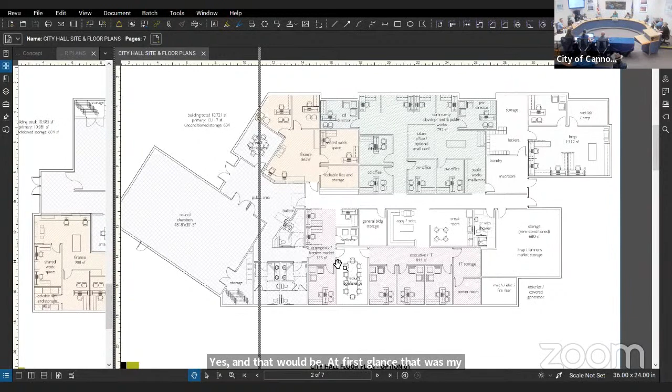Well, is there also another component, Bruce, that the building, that layout in the option the city staff would prefer, is that the building just works more efficiently? Yes, and at first glance that was my feeling, that that setup would work more efficiently, and that would be my desire to get that type of building, because it's going to have more longevity. You're not going to have to try and, God forbid, remodel it because it's not working efficiently for the people that it was designed for.

We're not increasing the square footage more for the current building, hopefully it's designed more efficiently. But I'd like to be able to present something that's going to be fairly long-lived. Great.

As we decouple, you can say yes, we feel comfortable with the police department moving forward with this, you guys are on the right track, continue. Or you can say we're comfortable moving forward but we must see more exploration here, and we can come back on city hall. That's really our benefit to decoupling them, is that one's not a linchpin to the other. One can march forward, and if they can both march forward at a good clip, that's beneficial for costs, because if we continue to beat timeframes, we'll continue to beat cost escalation.

Are you relatively comfortable with the police station? Yes, I was very impressed with your presentation. Thank you, let's get started tomorrow.

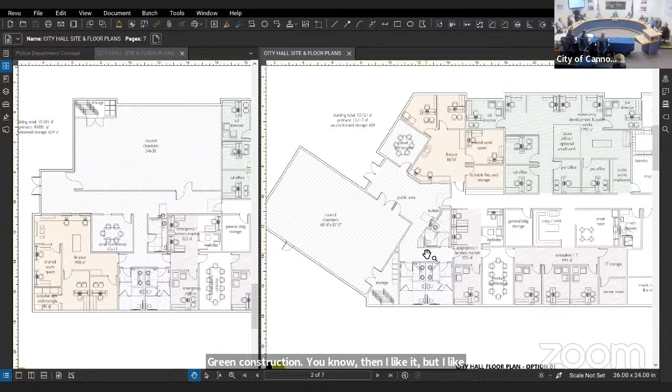But I like the way it looks. Design-wise, yes, I like it better too. I just don't want it to be... which one? The staff, the angled one, just because the staff feels it's secure, more efficient, and they like it better, and they're the ones who have to work here. And the public area just seems like it's more efficient. So it's not weird looking, I mean it's not like triangular windows or anything. It's still square, it's just part of it's offset a little.

So are we all back to option one? Option one is maybe our preference. From a layout standpoint, whether that wound up being offset as it is or not, I'm not particularly invested in that design concept. I would like, as Lisa said, to present something that works efficiently. I've made that point already. Fine with me, yep, no problem.

Was there one of the exteriors you liked? Because like I said, we can take elements - that's the beauty of the way we're doing this. We can migrate elements from the exterior onto different plans. So if there's one that caught your eye more, we can take those features into another one. That's the beauty of concept design, is that they're not independent.

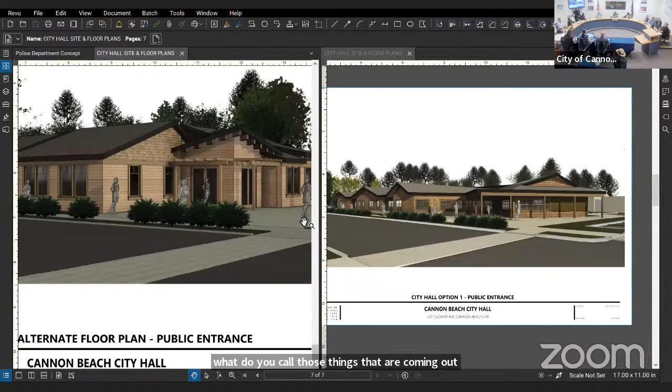I really like what do you call those things that are coming out on those things? Yeah, I like the way those look, they're sort of a little kind of rustic looking. And I also very much like the offset. I do like - I mean it's long, but both of them have that, don't they? Both designs have that, and I think that's really important to have.

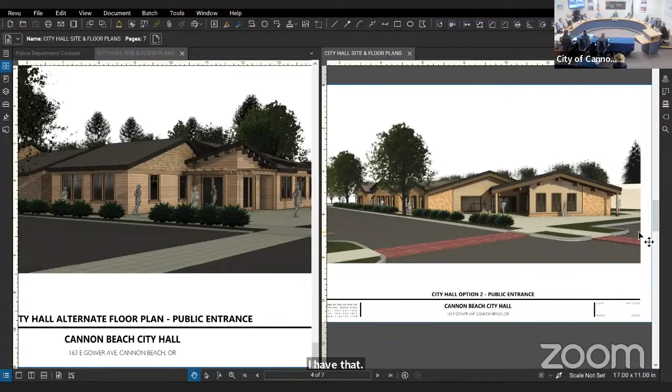Crystal clear, right? This layman— no, it's perfect. I think the scale of what we're hearing is appropriate. The streetscape concept helps minimize that scale, which makes it feel better.

Proceed with the angle, because from a staffing standpoint that makes a lot of sense. Come back and present a combined, refined version for the exterior, and hopefully that can move forward. You'll have time to look at the packet and bring other comments. It would be nice to see a net gain in trees, and I think the south side may allow that—there will be many more trees there.

One thing we're waiting to see is the survey result. The survey we have was done before that small retaining wall was put in back there, so I'm not 100% confident about that location and its relation to the existing trees.

Leslie, the current building is quite tall for a single-story building. Is the proposed structure going to be less tall than the current one? Yes, I believe in any of these designs the ridge is slightly less tall than the top of the existing building. So it will definitely have a much more residential quality to it, as presented.

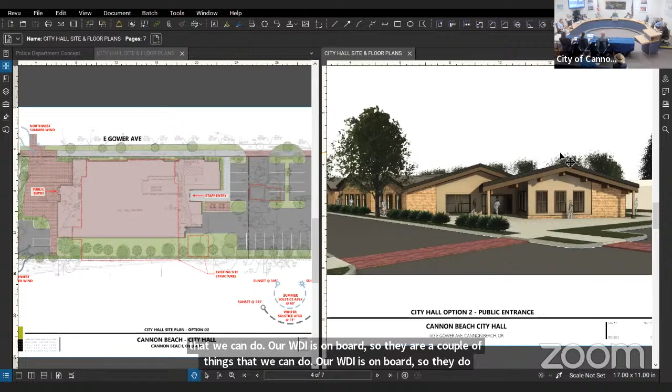Yeah, so there are a couple things that we can do. Our WDI is on board, so they do acoustics and will be looking at the space and providing guidance. In addition, R&W will also be able to provide some guidance. So we'll have professionals that can help us with that. And then Rusty's invaluable.

Thank you. Okay, anything else? Try it again, let's try it again.

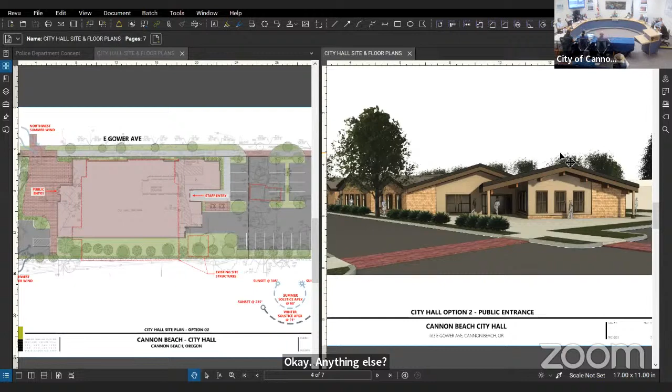I'd like to thank all of you, and I would like to close the work session and start the special meeting. So we're going to open the special meeting session.

Let's see if there's a motion from this evening's executive session. Yes, I would like to move to waive attorney-client privilege on the final engineering report from Windsor Engineers. Second. Okay, any further discussion? Roll call, Jen, please.

Councilor McCarthy? Sure. Oh, I'm making a motion, heard the motion, yes. Councilor Hayes? Yes. Councilor Kerr? Yes. Councilor Ogilvie? Yes. Mayor Knop? Yes, thank you.

Okay, anything for good of the order? Ruth?

Two things. We talked about the potential to get a donation of $5,000 to help with some of the nuisance plant removal in Little Pompey. We responded back to them and asked if the funds could be used for hand removal, and they agreed. Oh, great. And they have delivered that check.

And this is the right time of year to do it, the seeds haven't dropped. So what we would like to do is schedule it as quickly as we can. However, it does require that we do a transfer of those funds. Now that we've received them, they need to be sent to the right place in parks, and a general ledger number has to be assigned to it. That's done, I believe, by resolution.